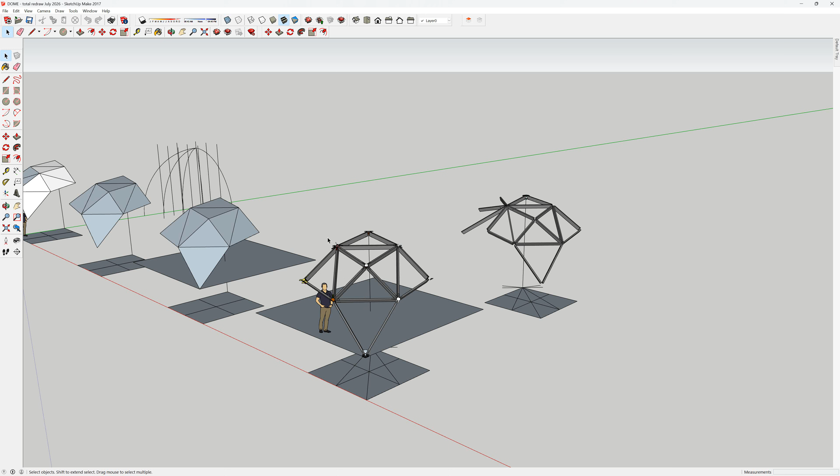Now, I'd made a decision to go with the tabbed plates like this, and I'm going to now back out of that comment a little bit by saying it's a 50-50 split between the tabbed plate and the tubular steel hubs that I had looked at several years ago. And I'm going to give it a 50-50 because I could go either way. They both have a lot going for them.

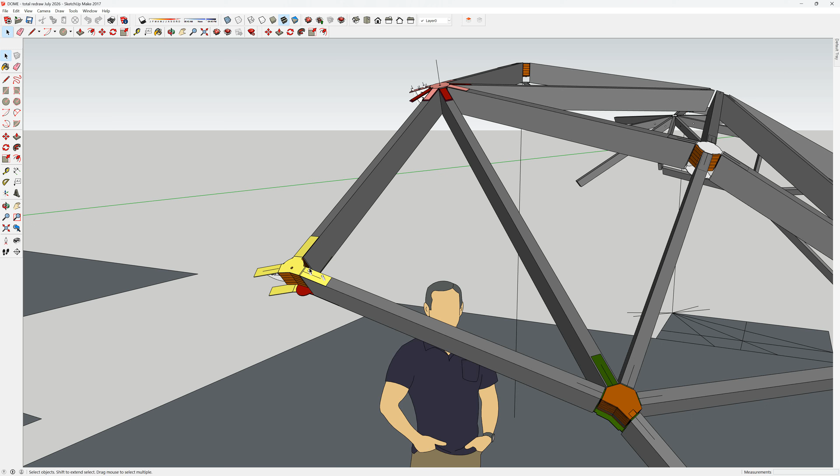This I like because it is a one or a two-piece item. That's it. Put it onto the dome, screw and bolt it into position. I'm done. The bottom ones could be bolted in place, so long as the bolts can perhaps recess and not come through to the top surface. And then the second plate, since I'd always want to go to a double plate assembly approach, the top plate could be screwed in place.

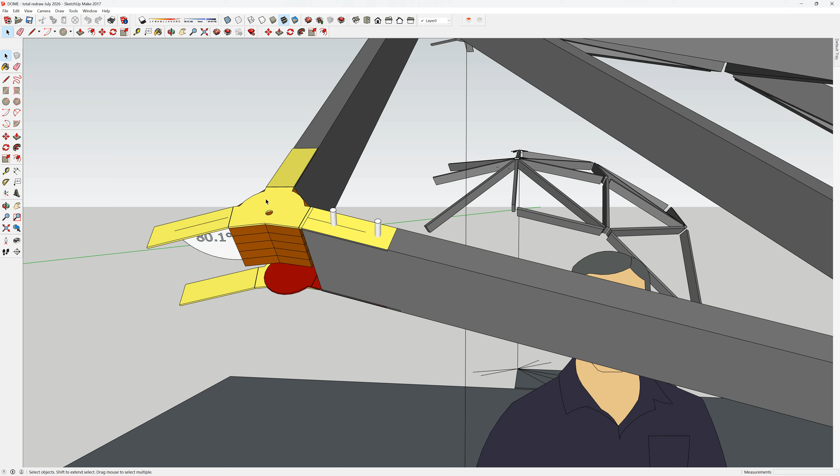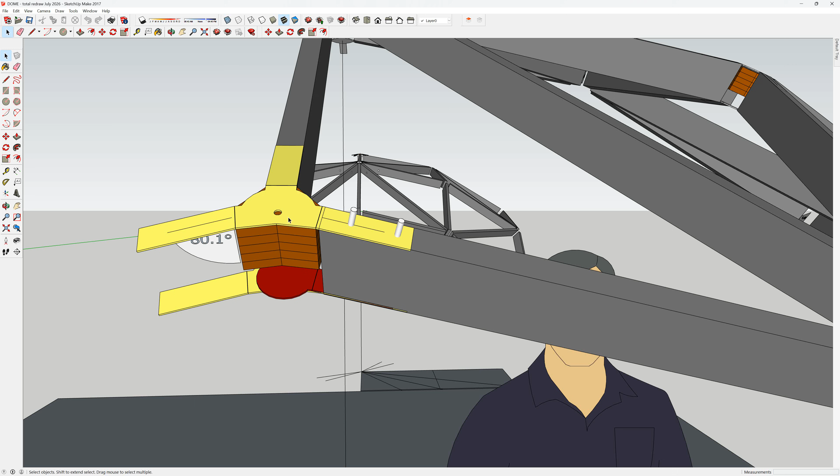It could also be bolted, but I'm just suggesting that the lesser demand is on this top plate. We've gone through that rationale many times ad nauseam. But yeah, bolt the bottom ones, screw the top ones. You've got your assembly finished. As the words come out of my mouth, I go, dang, that is not a bad thing to consider. It looks neat. It can be covered up underneath by underbattens. Do you need those underbattens? No. Can you use them? Yes.

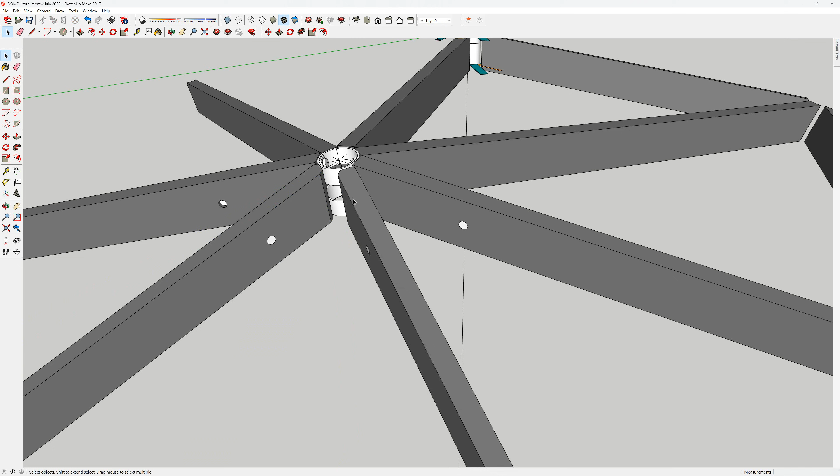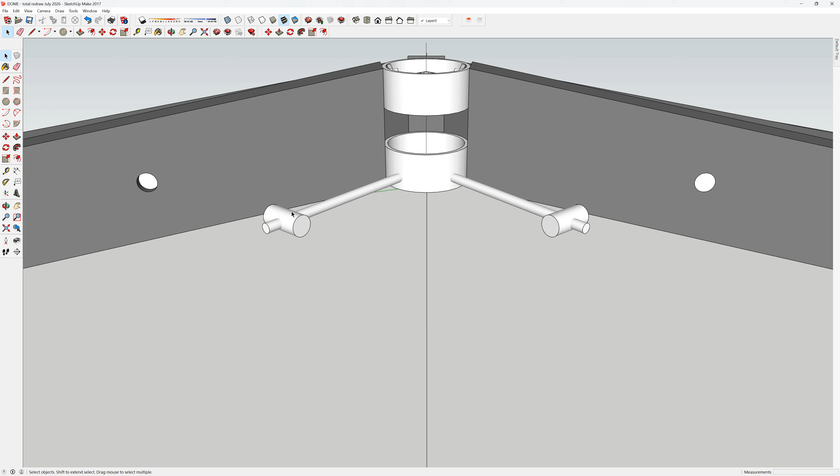Now, why would I want not to do this? Well, I've re-looked at the situation where I've got a tubular hub and these rods that go out into the hub, representing the rod going through and into either a nut, or in this case a barrel connector, where I would drill through either a pipe or a solid steel dowel, thread it with whatever thread I'm using, and it's going to bolt up really strongly, a nut on the inside, and you've got a very strong assembly.

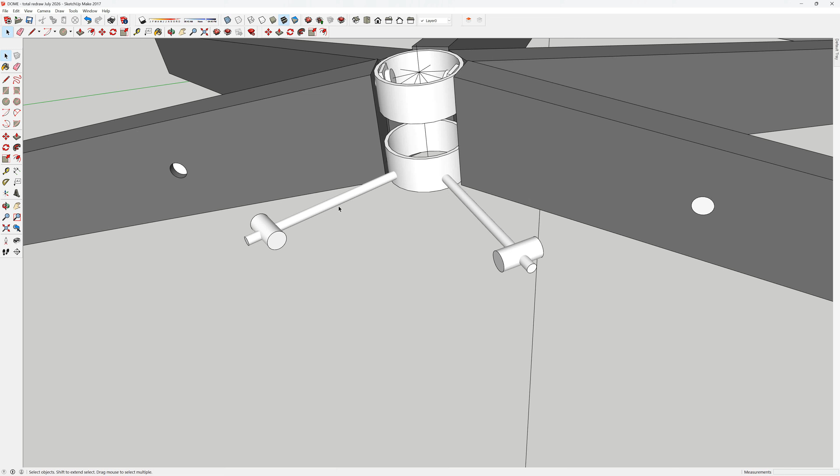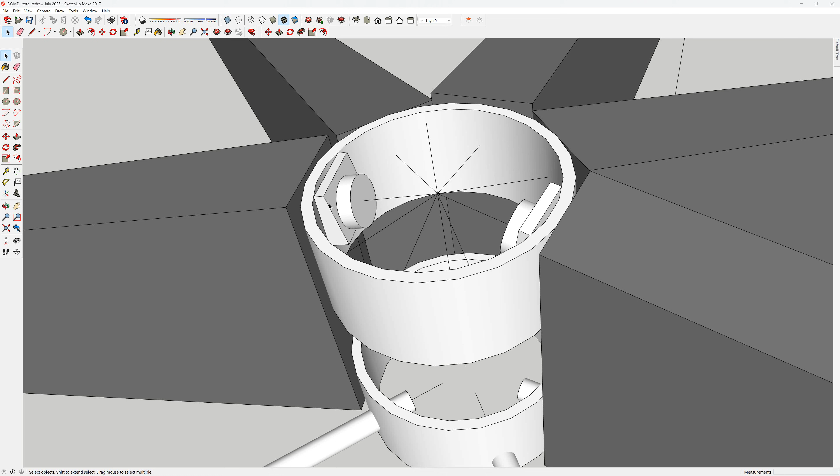In fact, it's probably the stronger way of doing things, in my opinion, just my gut reaction. Not an engineer, remember. It has a couple of complexities, so already it's not as good as the tabbed plate. I need to make an angled washer. That allows the head of the bolt or the screw to bed flat on it, whereas you can't get that if you just insert the bolt or the screw without it. So that's a little bit of a complexity. The other one is drilling this dowel and threading it. The thread shouldn't be that hard to make.

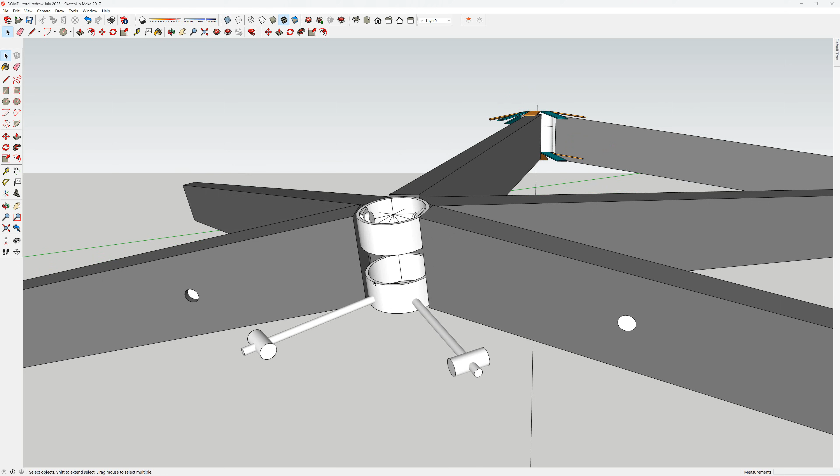Drilling a hole along the end of the strut. Yeah, okay, so it's got some things going for it and against it, but it still makes for a very neat, unobtrusive, one of the requirements, hub assembly. From underneath, pretty darn attractive, I've got to say.

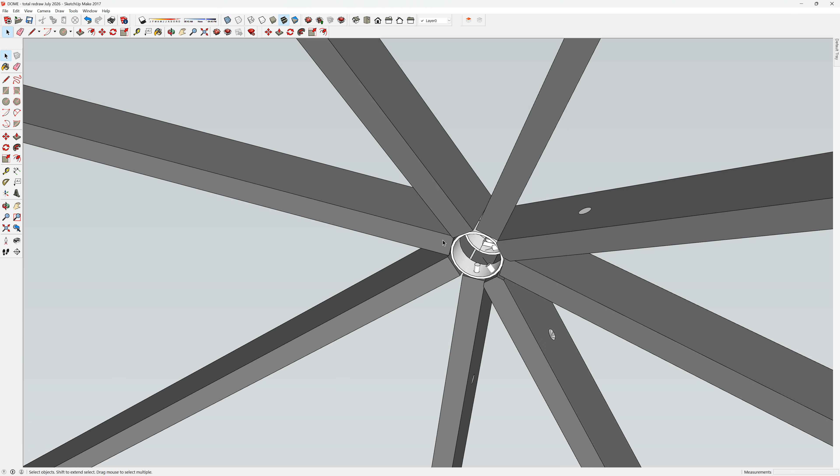Would I like it over the tabbed plates? And I probably would. Cover this with either a steel plate or a wooden plate. Maybe putting even some underbattens on for different reasons. That's a nice assembly. In fact, if we recess the fixing, the tubular dowel here, the tubular nut, I could put a timber plug in here, making it almost invisible. Lots of pluses with this.

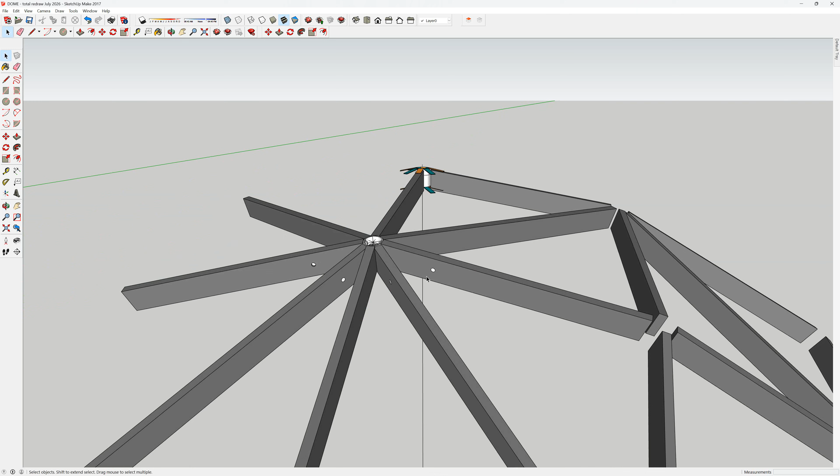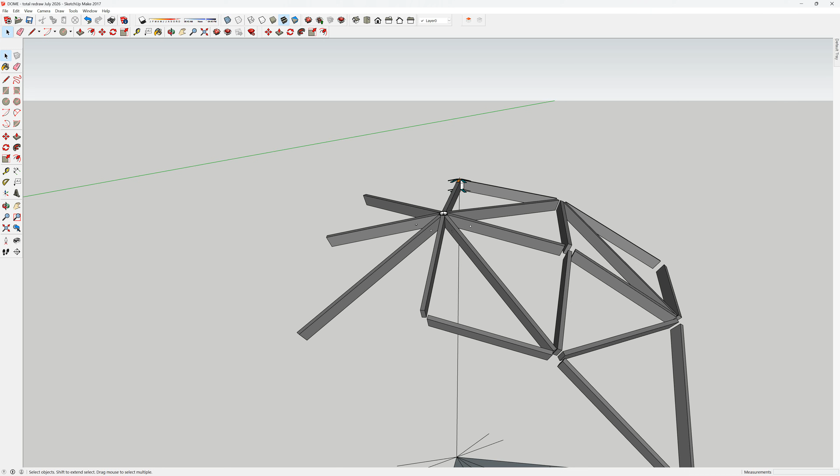So, what triggered me to this? Well, it was a video I watched just today and yesterday, but I've got a screenshot of the chap's site so that you can have a look at it. Let me try and find it. It's on my desktop, which is a bit cluttered at the moment. This is it here, I think. Yes, it is.

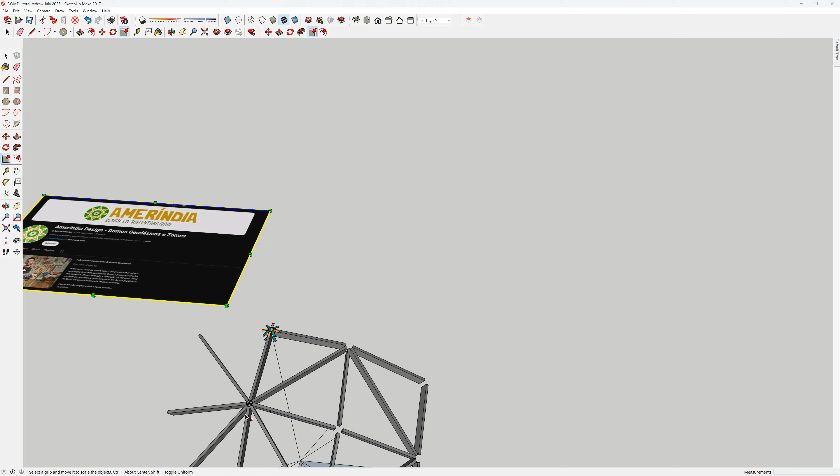Brazilian, and he describes 3 hub choices. One is exactly, sorry for the zooming in and out, exactly what we're talking about here. One where he uses a steel centre hub and threaded rod, etc. The domes that he makes are generally full domes, and they can be quite big. He's well worth having a look.

There's some translated text, and there's some where the spoken language has been translated into English. Well worth having a look and seeing what he says. The other type is, of course, the star plate, what he called it, and I'm saying the tabbed plate, and the layered tabbed approach. And he gives a rationale behind each one. I like it, so that's the site that you want to go to.

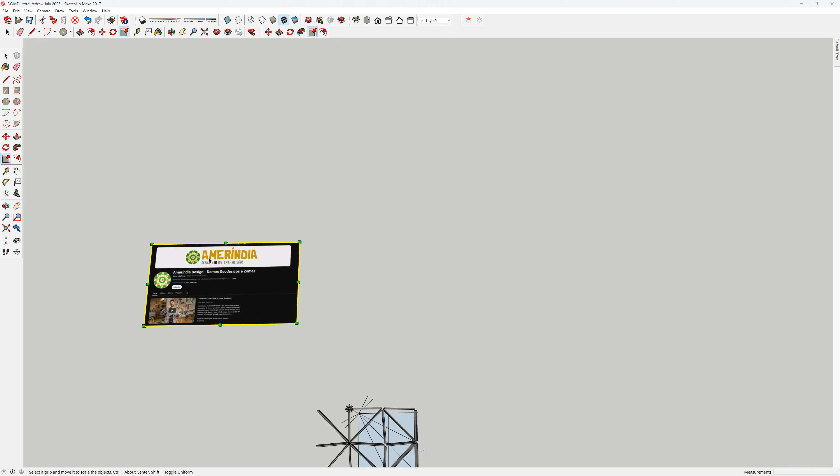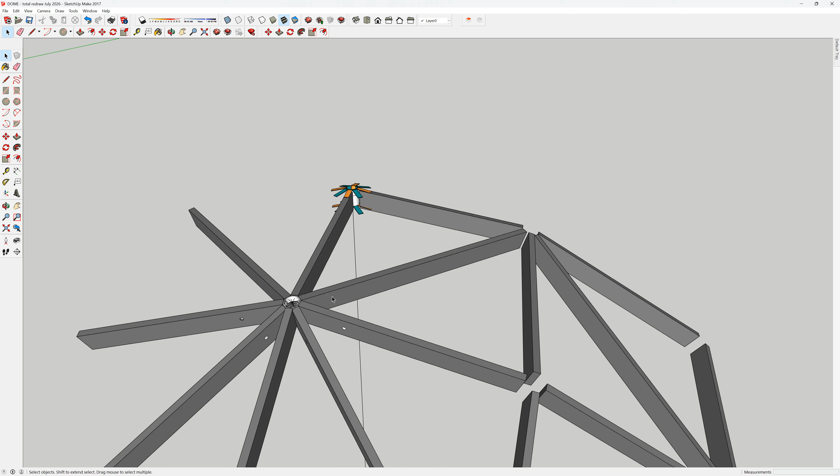So, yippee. He then gives some opinion on which he finds better for different reasons. This one he does actually say is a little bit more flexible. And I thought, well, that's interesting. It's more forgiving, which was interesting. And believe it or not, he likes this tab plate approach as well. So do I.

And the steel that he was using was about 5 to 6 millimeters thick, so a lot heavier than what I'm contemplating now, which is kind of a tick in my opinion. But we are using the double plate approach, so I think this is going to be more than adequate. But again, you can increase the performance of this plate simply by increasing the thickness of the sheet metal.

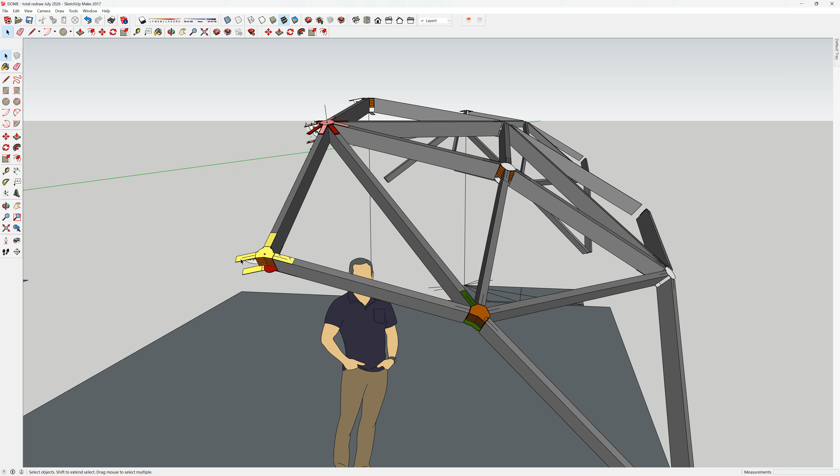Then he went back to the style of dome that I've already rejected, the ones that I'd shown and am no longer looking at. But he did them very much like a joinery type scenario using very nice timbers, and the joints were very attractive, and I've got to say it changed my opinion on this style of dome a bit. Still not sufficient for me to want to build, but when you look at some of his output, you would go, wow, maybe this becomes more of a way of doing it.

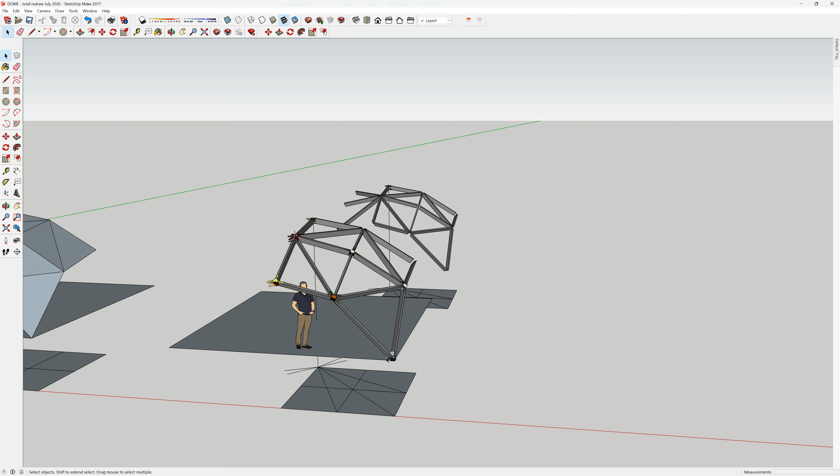Now you can build this style of dome, if you want, based upon what we're doing here, and that's why I went. As I said, we've come to a bit of a dead end, a natural dead end. Because if you want to go one path, you carry on in your own drawings, or we'll follow on like I'm here, and we'll carry on this particular model.

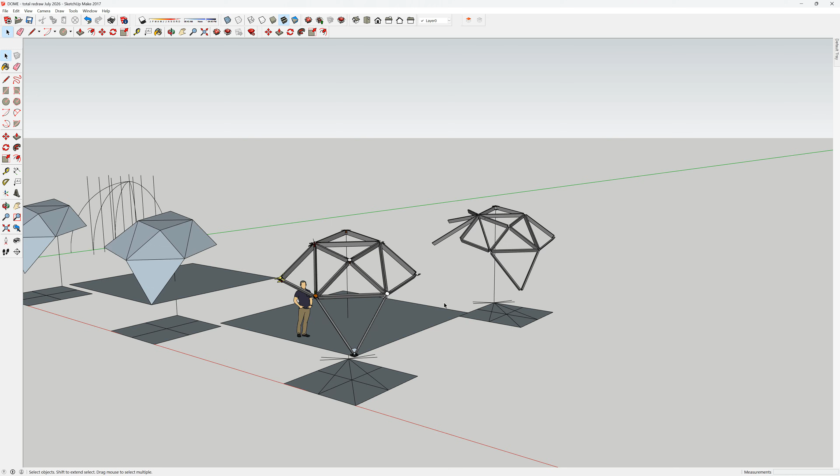Will I carry on with the tabbed plate development? Yes. Will I carry on with the tubular hub and threaded rods hub? Yes. So both of these will be developed in parallel. Pretty much certain that will be the case. There'll be a bit of interruption from me doing that. It's going to take a little bit of thinking. The one thing I would have liked to have done was to make both strut models identical.

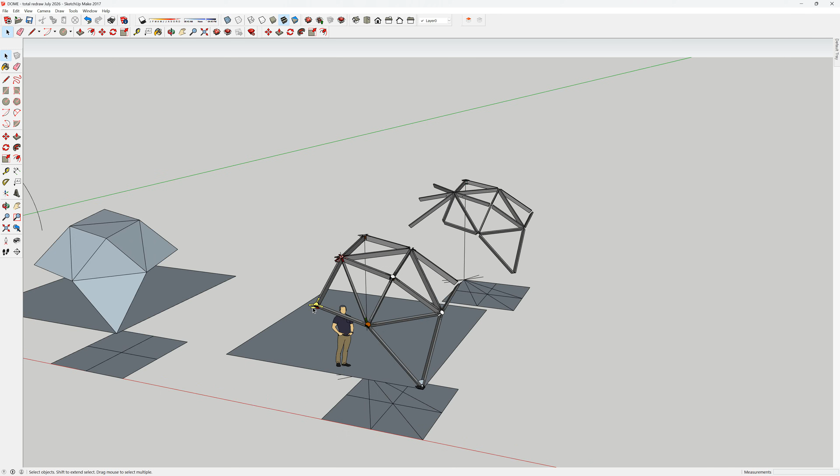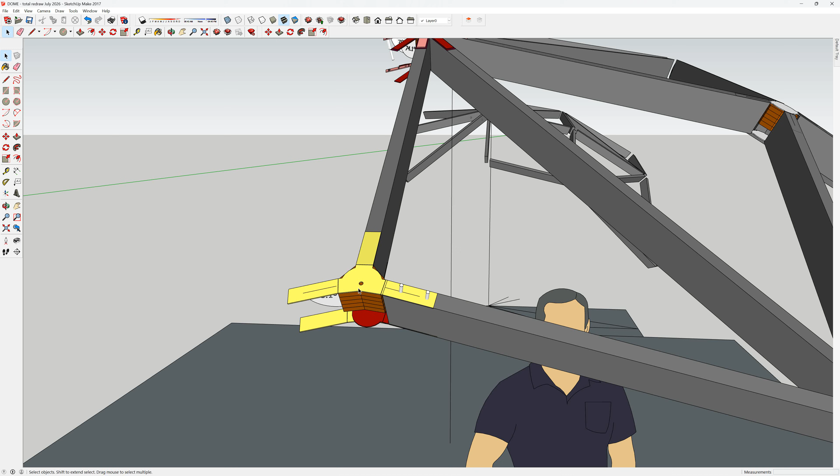It means that I can go with either, but that might or might not happen. When I went to do this particular model, I went to a larger size here for the plate, up to 70 mil, 140 mil diameter. Why? Well, I can go between a tab plate and a steel hub at 140 millimeter diameter, and it meets my criteria for having the two models the same.

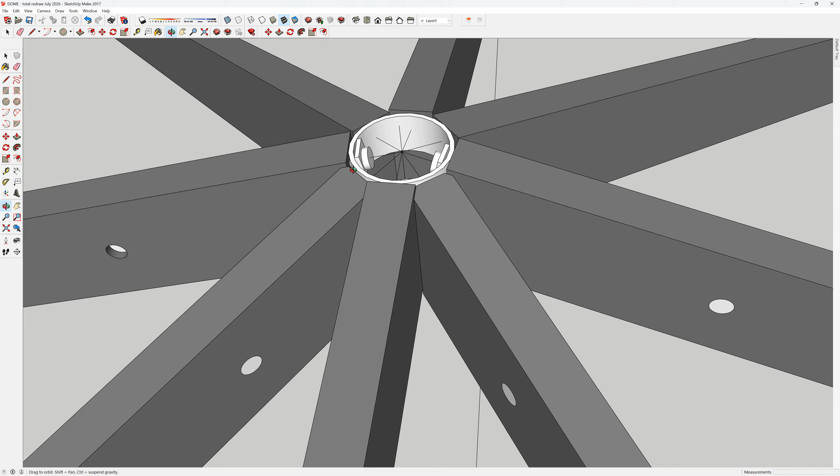However, I would prefer to go to a smaller hub. In this case, it's 114 millimeters. The reason for those measurements is it's what's available. So, yeah. Going smaller means I have to trim a couple of my struts. It's a bit of a downside. It goes from, I'm just measuring there, that's 35 millimeters across.

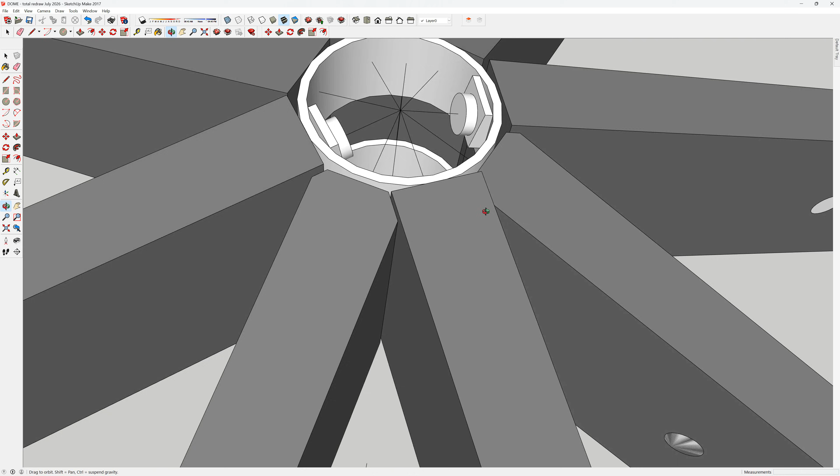I could change the width of the struts to allow maybe 40 millimeters. That's not a standard size. 35 is, 50 mil is if it's rough sawn, and so there's lots of criteria. In the end, I thought, to heck with it, let's just trim a couple of the struts that offend so they don't bang into another strut, and just leave it at that. And I think that's the compromise that I'm going to be happy with. Not much of a compromise, and well, it might be what I just have to concede.

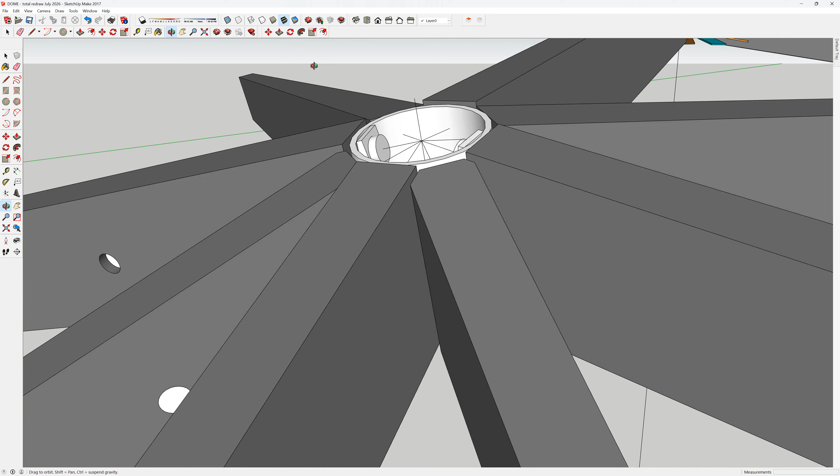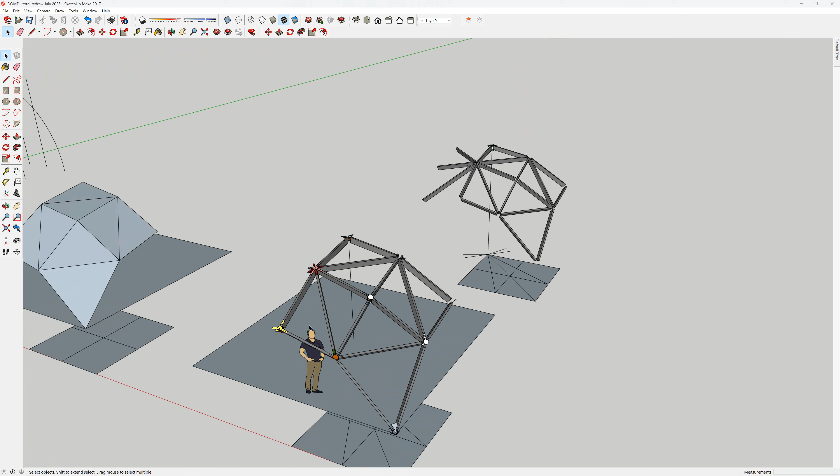So, where are we at now? Well, I'm going to carry on doing some modelling. I'll have a little bit more of a fiddle here. I might make up a prototype just using PVC pipe, because I've got some 100 mil out in the garage, and make up a prototype of that. Maybe make a prototype of this, because I've got some steel 16 gauge, wee bit lighter than this, so I can use that as a proxy. I will then reevaluate the pluses and minuses, in my opinion, and then I'll report back. Now, that could be a few weeks or a month or more away. We'll see. A lot going on in the background with me.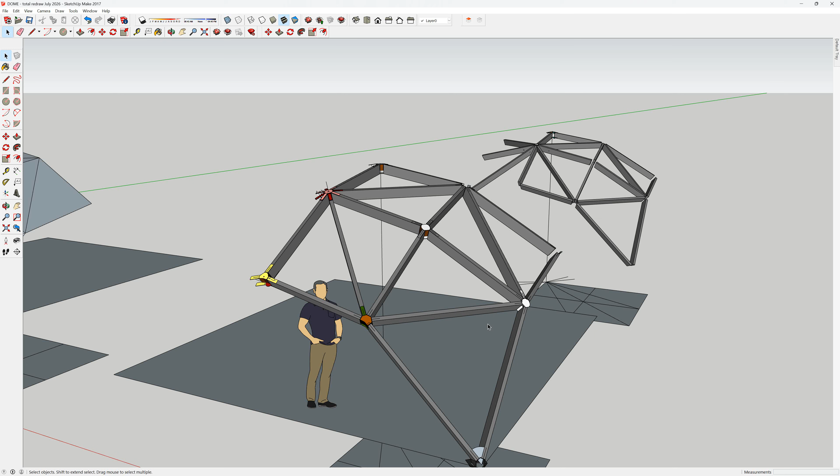The house, and I've said this, so excuse me for repeating myself, but it's very prevalent in my thinking. The house I've lived in for 65 years has now been put up for sale. Another property has been put up for sale that I inherited, so therefore I'm going to have to look for a new home, literally and figuratively. And that means I may be a bit distracted in a good way, but also I may need to move a lot of the stuff out of the numerous sheds that I've got into a new house and workshop. So it won't be happening in the next 2 or 3 months, so I may well have progressed quite a ways in that period. But I'm going to be thinking about other things.

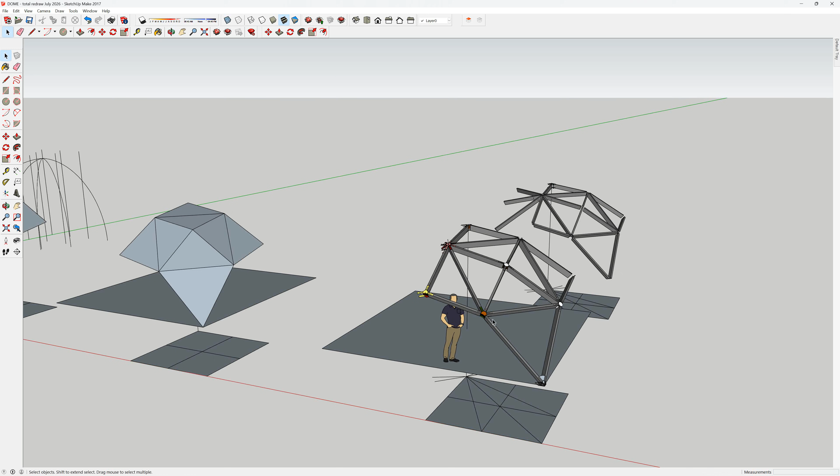One of the other things is the dome and the workshop that I'm going to get, which will be better than the one I've got now. Oh, yeah, you can well imagine me out in a better workshop. So, yeah, there's all these things, very, very positive, but quite discombobulating in some ways. The thinking goes elsewhere than it should be. I haven't done as much modelling on this because of that, but this all happened or was confirmed today. So, yeah, some very positive things. Might even make a video or two with that subject matter or the implications. Moving house after all these years, and having a new place to go to.

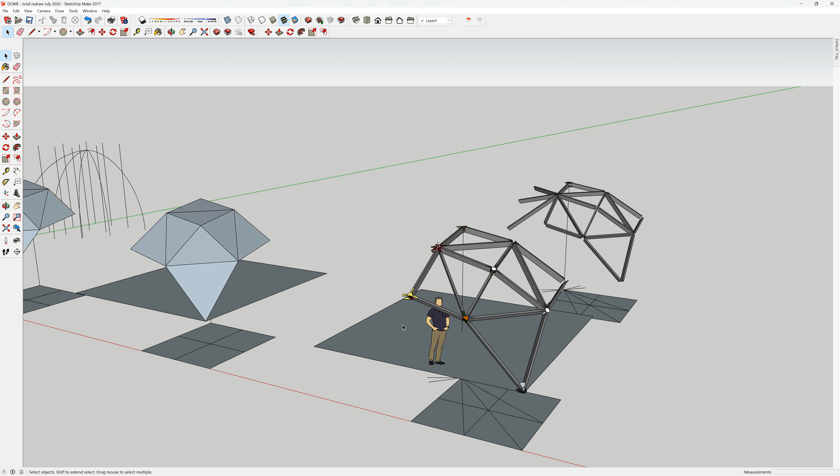Ooh. Anyway, now you know. Probably didn't need to, but you do. So you're up to speed. If you've already known that, and I'm just regurgitating it, oh well, so be it. But anyway, all sounds quite positive to me. Interesting stuff.

Rightio, that's it. I'm going to wander off. I think I've covered everything I need to for this one. Do we end the series now, or do we... No, I'm going to continue the series, saying the total redraw. I'll get at least this model done, and then I will go to this one. So it'll run in parallel, perhaps.